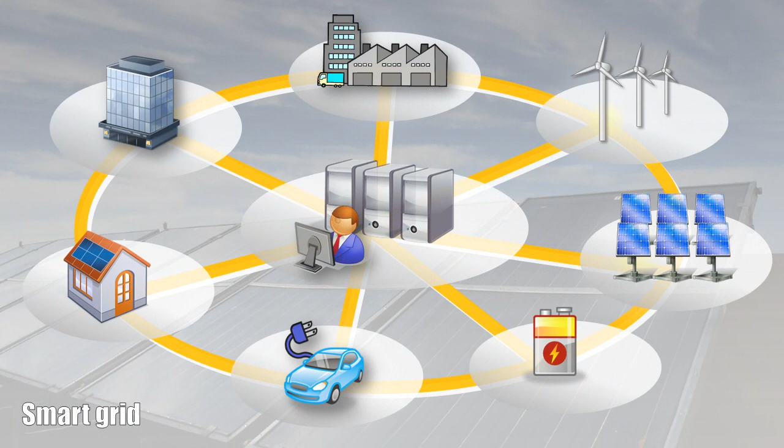We would like to begin with the electric switchboard market in the world. Power demands are growing rapidly in recent years, especially in economic growing countries such as China, India, and Brazil. We also see global increase in power demands since we are moving to a next generation social system called smart grid that optimizes energy efficiency. Based on these backgrounds, the global market size for electric power distribution is expected to grow twice the size in 10 years, from 2010 to 2020.

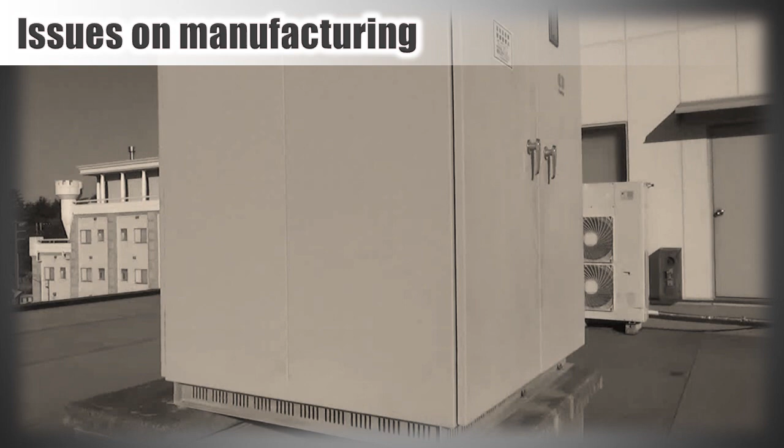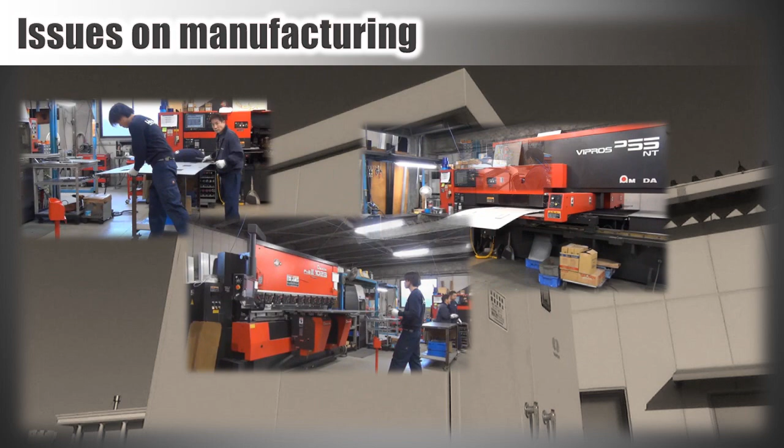The companies are, however, required to differentiate their products with short delivery and customization while complying with standardized functions such as durability and strength within severe production cost restrictions. Also, from manufacturing perspectives, it is thought to be easy to manufacture since they are box-shaped, but each customer has different sizes of electric equipment or setups, resulting in high-mix, low-volume production, which is very difficult to improve efficiency in.

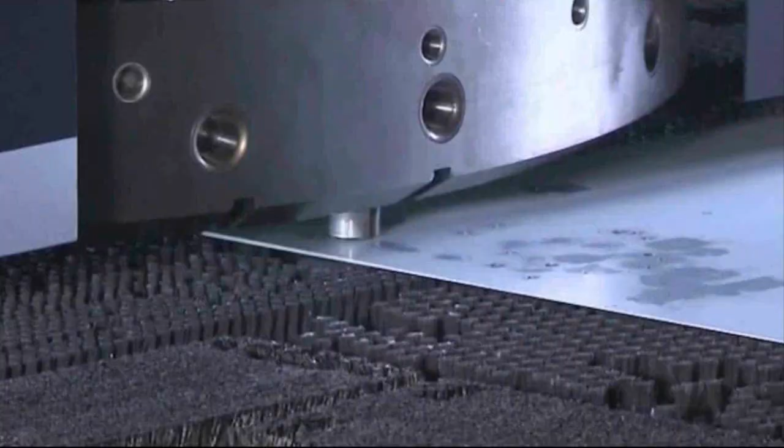Therefore, lead time and cost reduction are required in both the design process and manufacturing process, and reform for new manufacturing is imminent.

Now, we will show you a case study for improving efficiency with outdoor distribution boards used for solar power generation and busbar electric components.

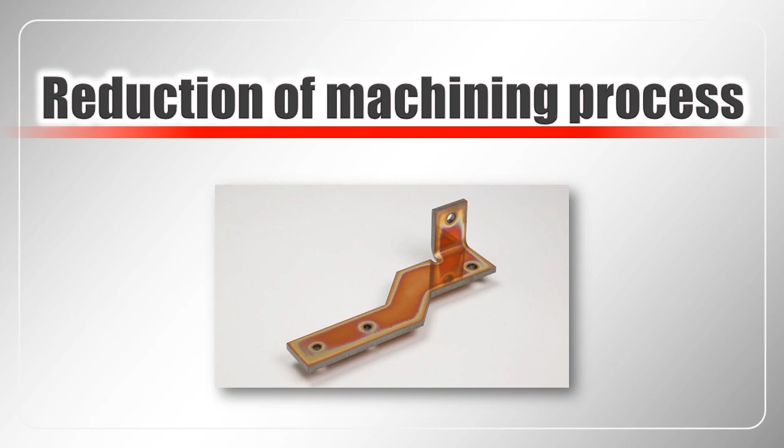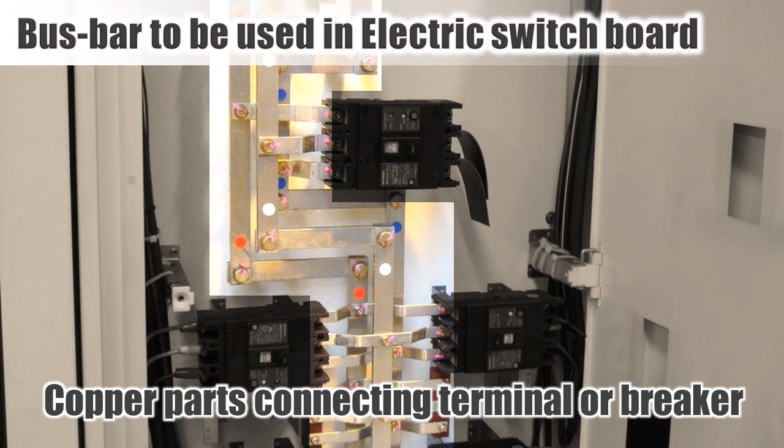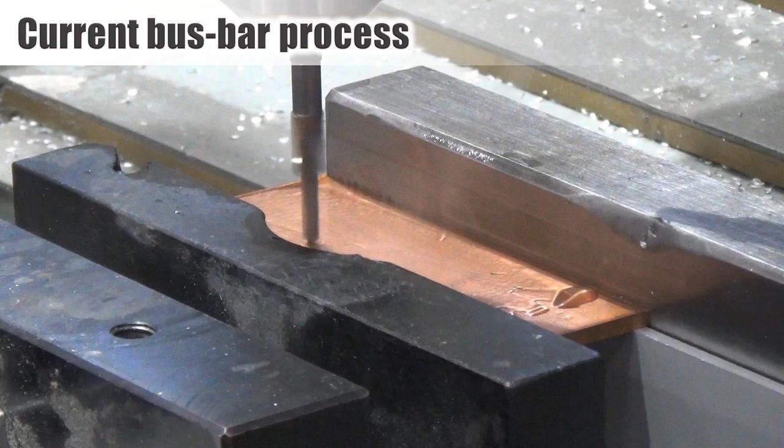First, we will show you the reduction of machining process of busbars. Busbars are used to distribute electricity by connecting terminals and breakers inside the electric switchboards. They are made of copper and coated to a silver color. Busbar blanking processes are generally done by machining or punching.

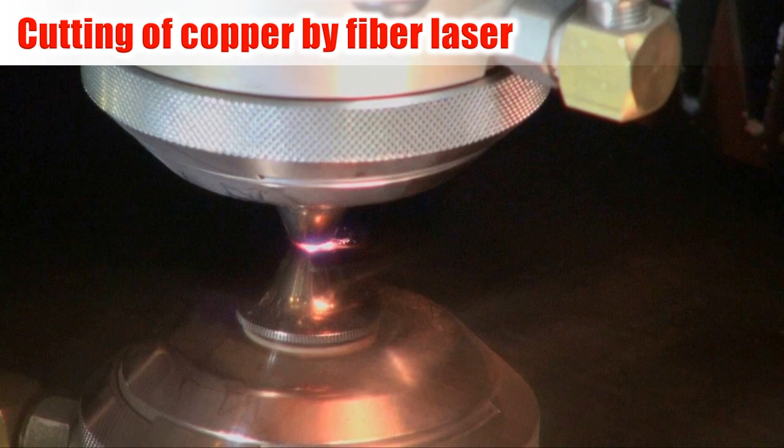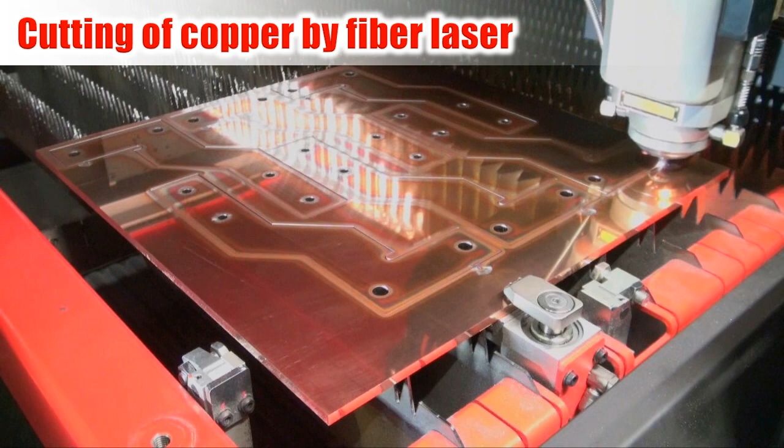Today we would like to introduce the cutting of copper with a fiber laser machine as a new processing method. As you can see, the fiber laser machine enables high speed and high quality cutting of copper. This was made possible by the different characteristics of the laser beams.

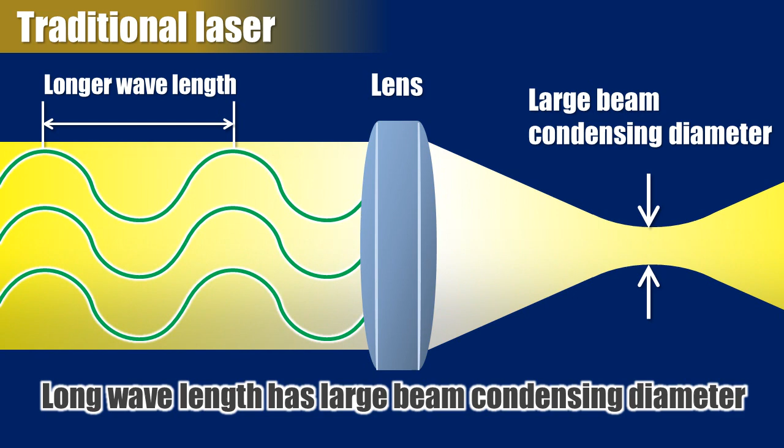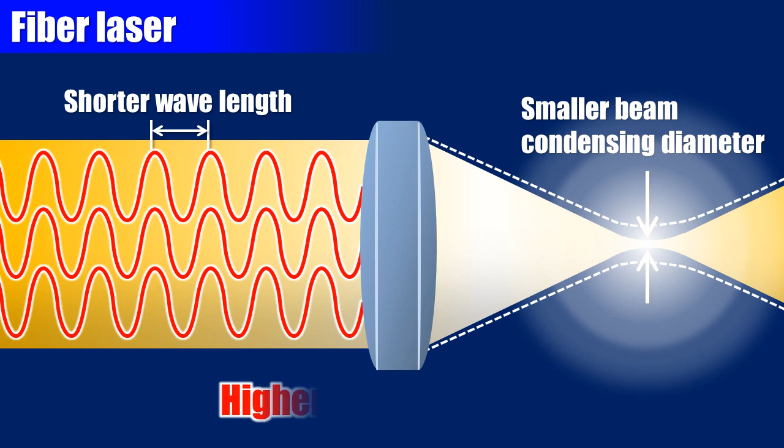The wavelength of a laser has a correlation between beam condensing and reflective ratio. Let me briefly explain their characteristics. The traditional laser with long wavelength has a large beam condensing diameter. By contrast, fiber laser with short wavelength has a smaller beam condensing diameter, so the energy density at the focal point of fiber laser is higher.

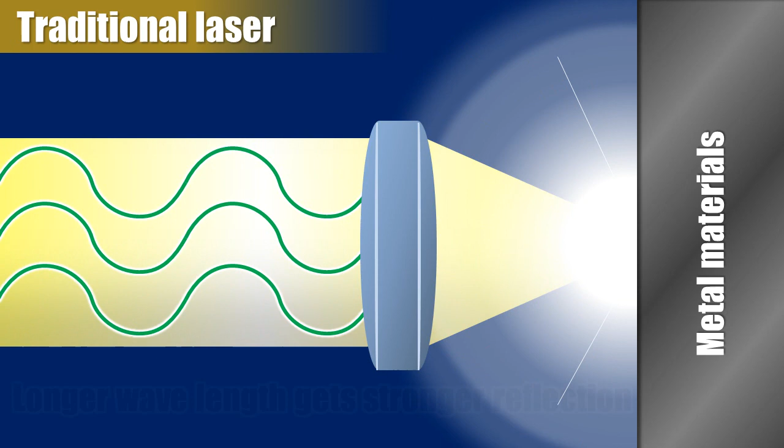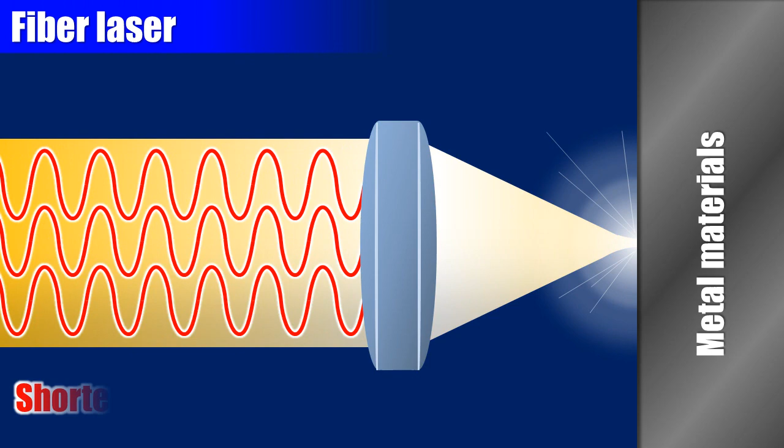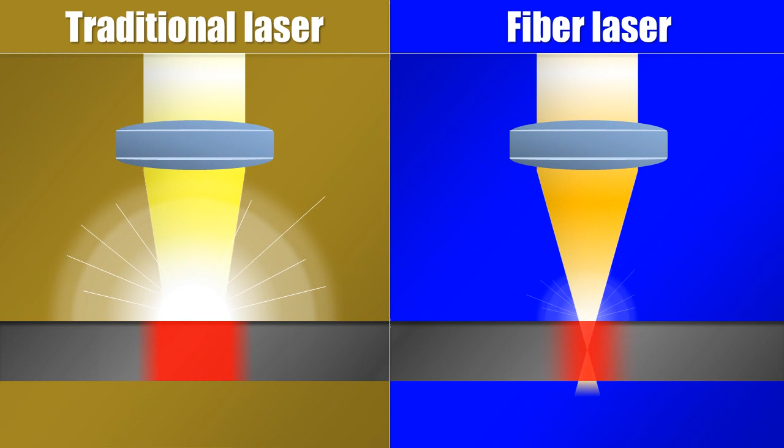Also, when laser beam is applied to metallic material, longer wavelength of traditional laser gets stronger reflection. By contrast, fiber laser with shorter wavelength gets weaker reflection. Therefore, fiber laser can cut copper, which is generally called a highly reflective material, at high speed since laser energy can penetrate efficiently.

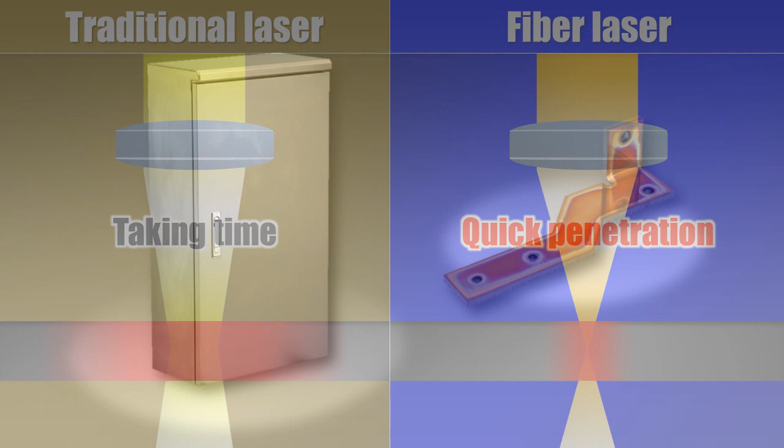From here, we will show you how to increase work efficiency with outdoor distribution boards as an example. First, we will introduce the new blanking method that will eliminate the painting preparation task.

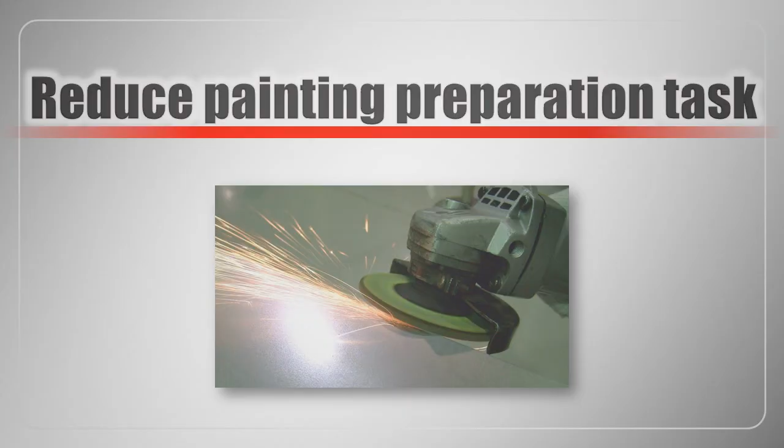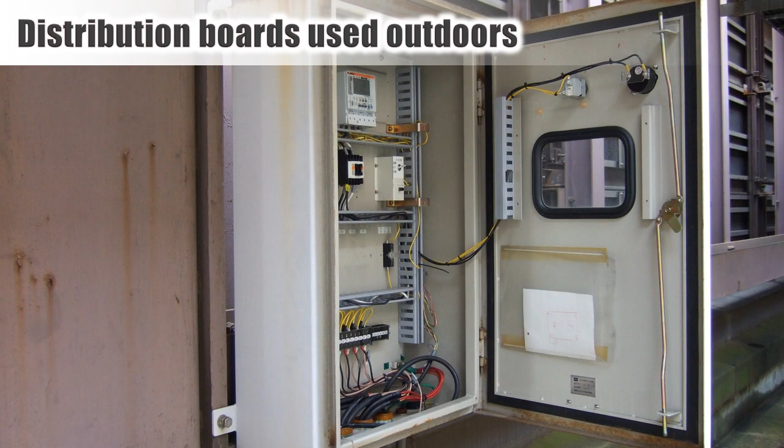Various durability performances are required in distribution boards used outdoors, and one of them, resistance to corrosion, is a particularly important factor. One of the spots that are susceptible to rust is the end face of the sheet material. It depends on how it is painted, but if the edge of the end face is sharp, the coating paint is thin and more susceptible to rust.

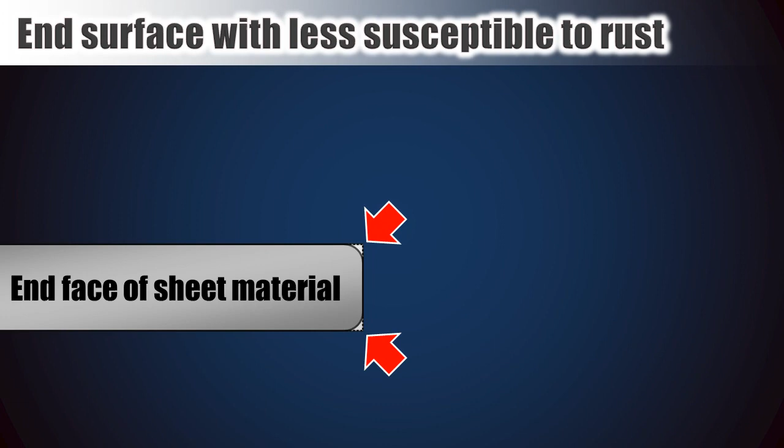By finishing the sharp edge of the end face into a radius, the thickness of paint on the edge is more even, therefore less susceptible to rust. So the sharp edges are round chamfered by hand before the painting process.

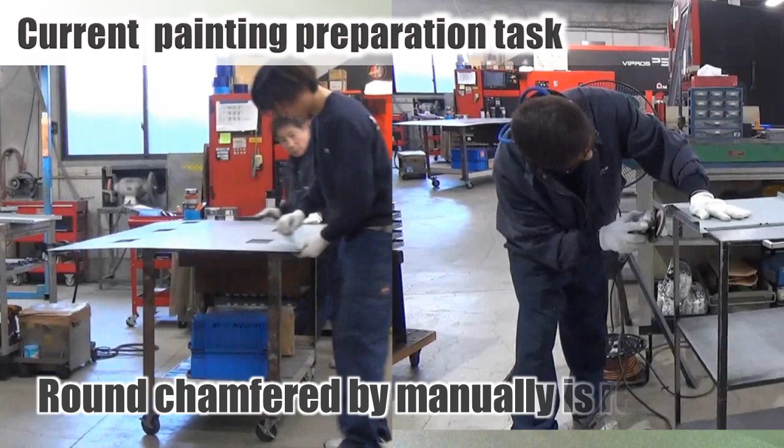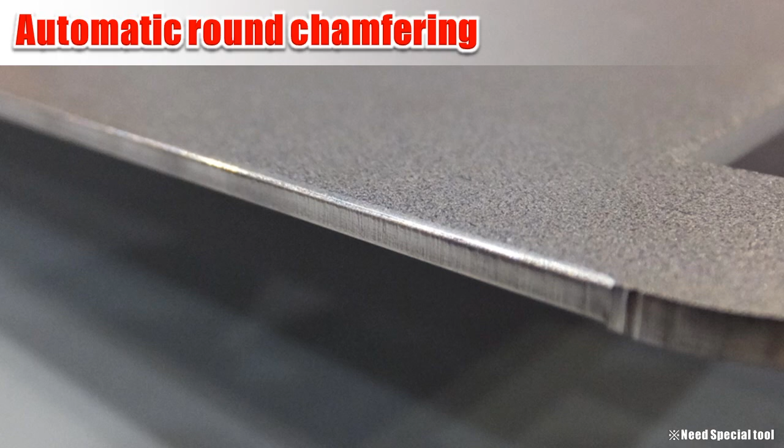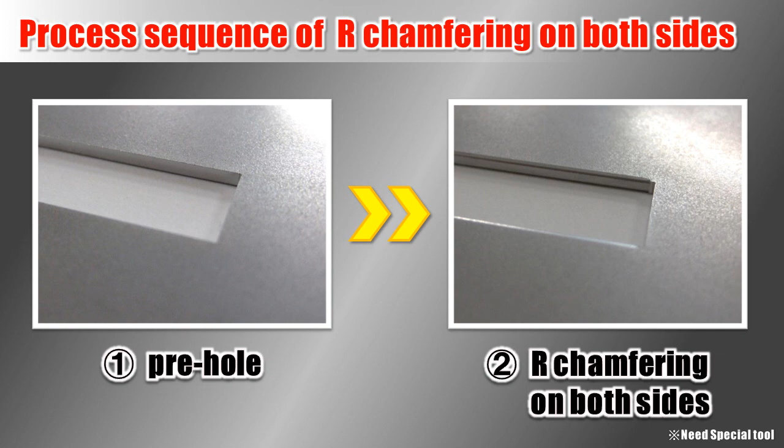Today we will show you how to reduce lead time and stabilize quality by incorporating the round chamfering process automatically into the blanking process. Round chamfering is done in two steps: pre-hole, then R chamfering on both sides. The first process is the pre-hole.

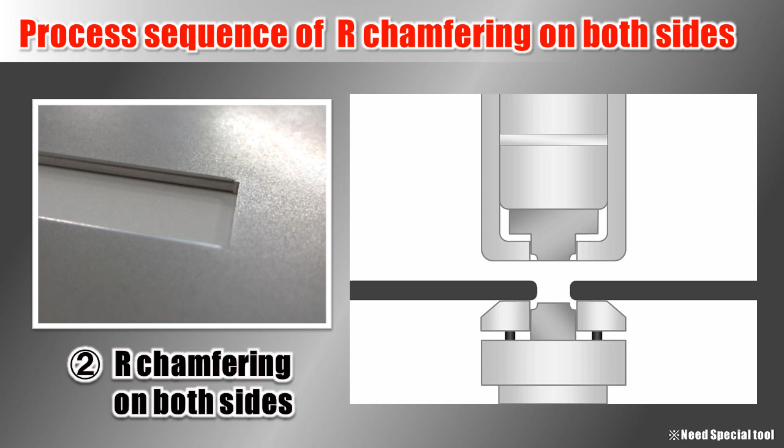Second process is the R chamfering on both sides. Round shape is formed by progressive feeding process, so the process length can be set freely. Here we use the tool to feed at 18mm pitch.

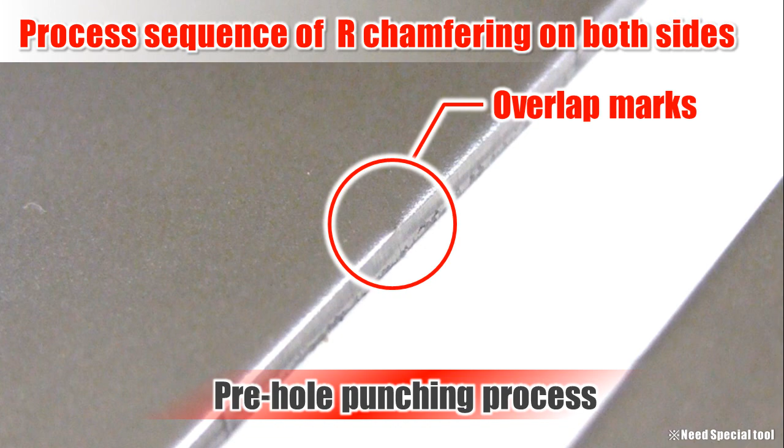Pre-holes can be done by punching as well. The overlap marks and burrs from this process can also be round chamfered.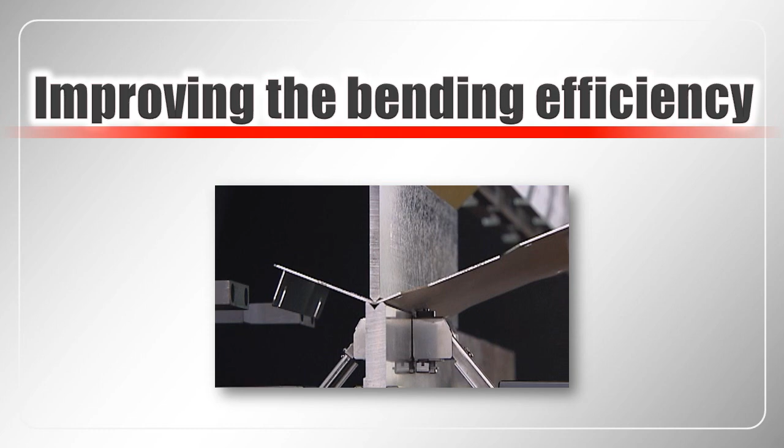Next, we have two proposals for improving the bending efficiency. It is very hard and difficult to get a right angle for large and heavy material. If the production lot is small, your workload is even heavier.

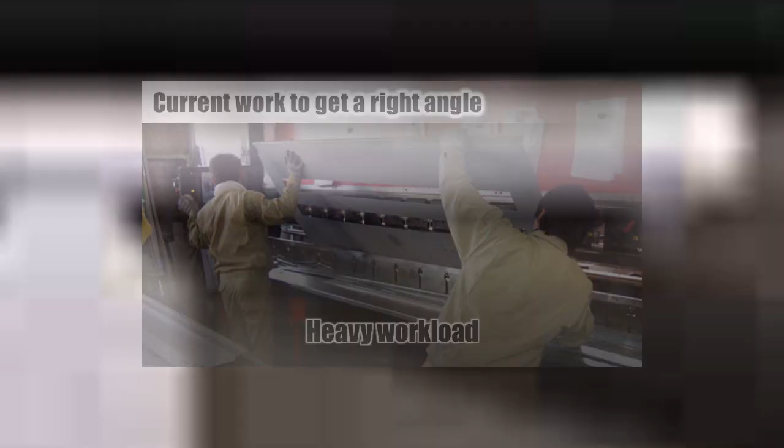Bending angle sensor enables correct angle from the first try even for new orders. Besides reducing the lead time of the bending process, the quality of the next welding process will be improved.

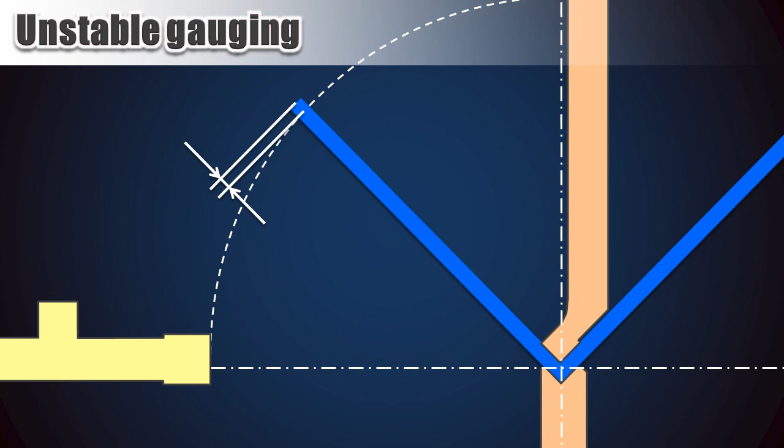Also, gauging of large size material is difficult and hard. If the distance between the bend tool and back gauge position is far, dimensional accuracy will not be steady due to the difficulties of material horizontal gauging.

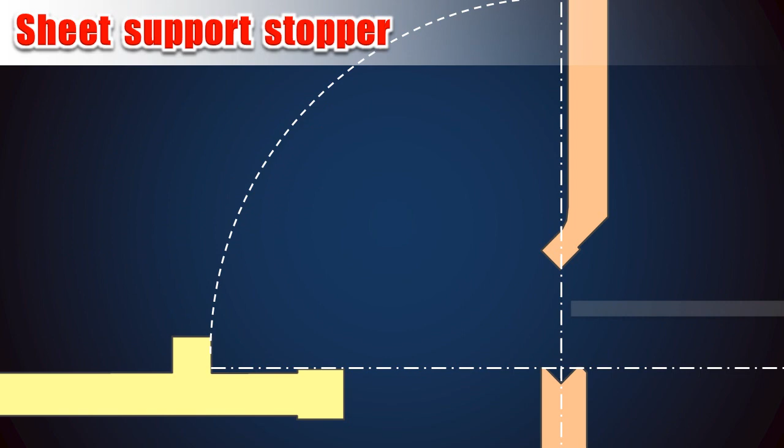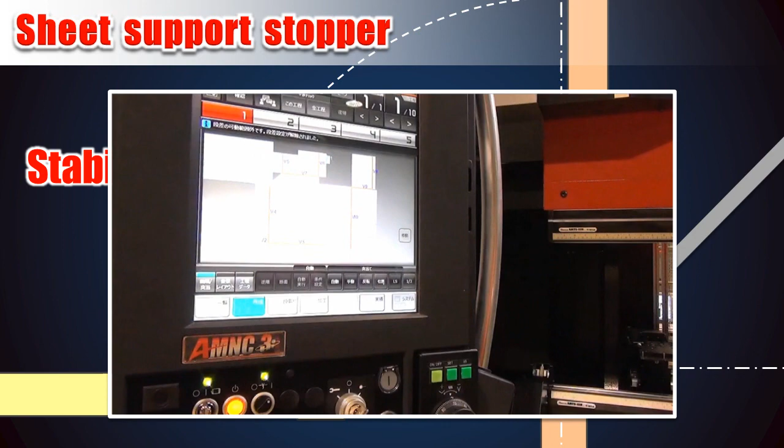In this case, back gauge with support fingers should be used for speedy and accurate back gauge positioning. The back gauge position is automatically calculated by pressing the button on the operation panel.

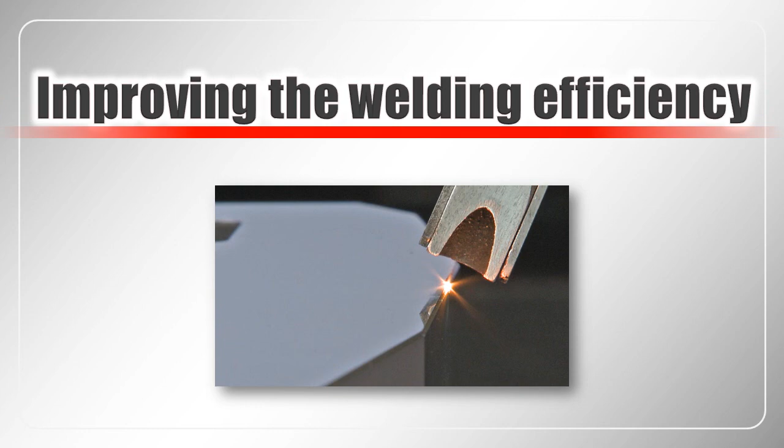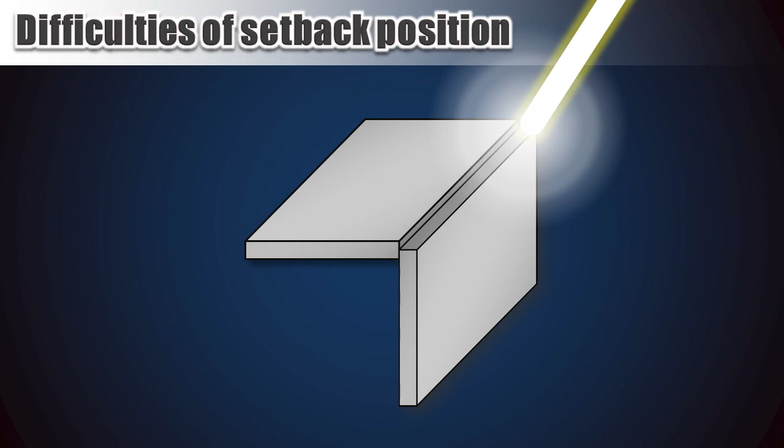Next, we have two proposals for improving the welding efficiency. When the welded section is made like a radius shape, the setback amount is half of the sheet thickness. This setback positioning is very difficult.

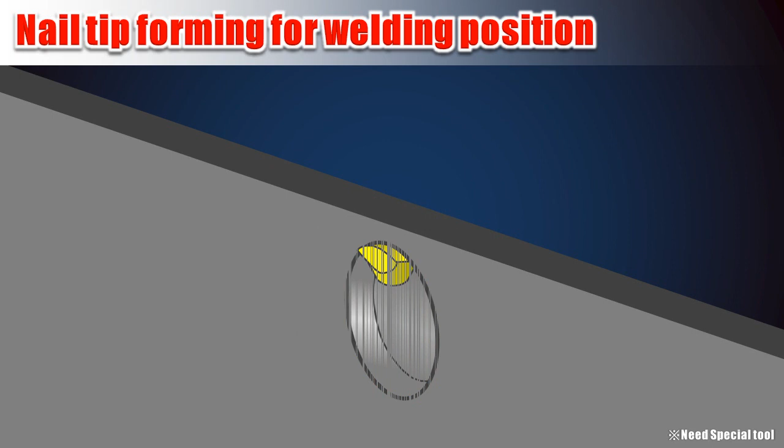Here we introduce nail tip forming that effectively reduces the positioning workload. By adding this process, setback of half sheet thickness can be done easily.

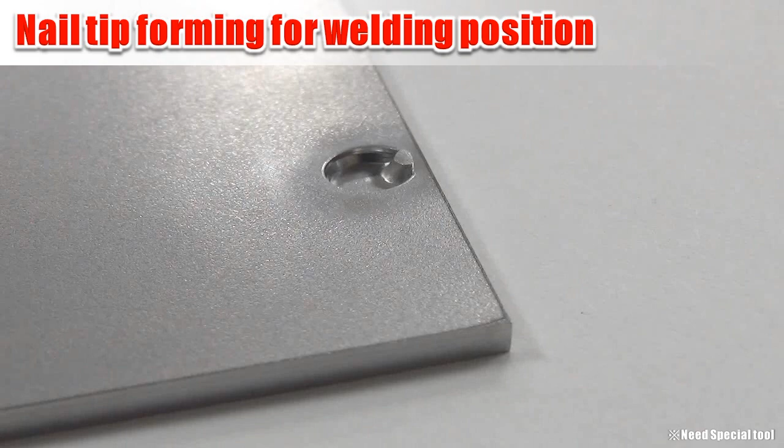This will not only reduce the positioning time of tack welding, but also improve component accuracy. Also, the back surface is flat, so finishing process is not necessary.

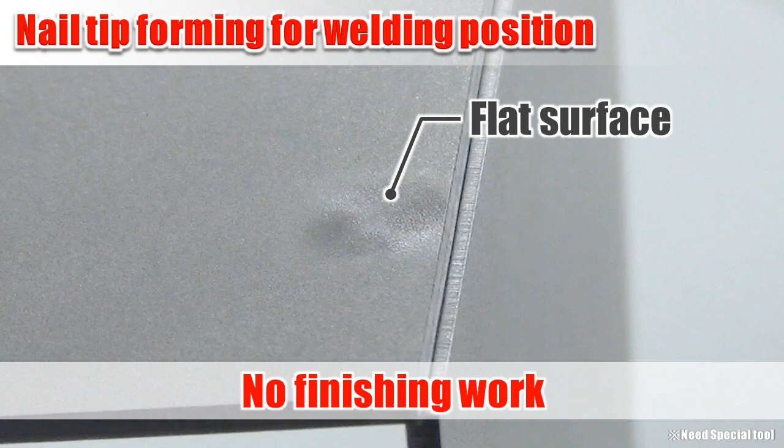The nail tip forming in the blanking process will be done in a single process. Press material swells and forms the nail tip shape.

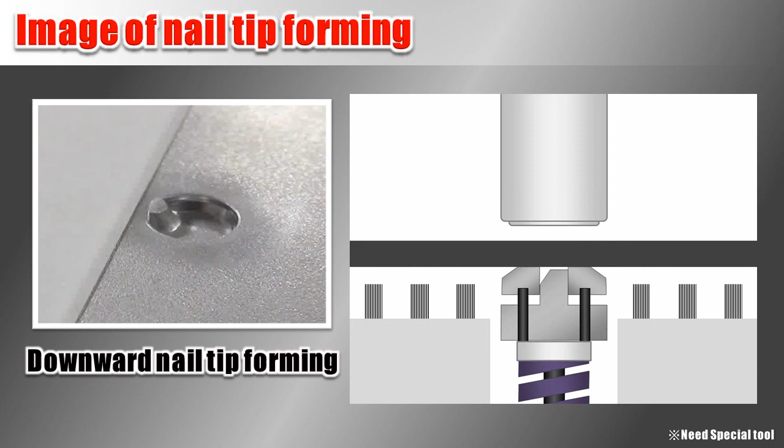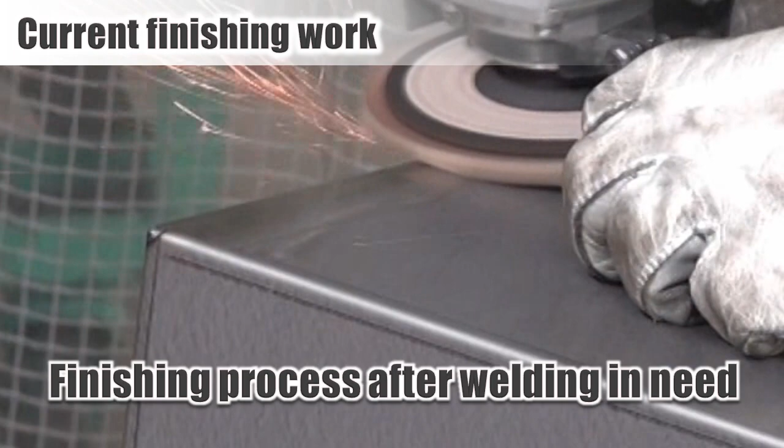Next, our proposal is for reducing the finishing process. With general welding such as TIG, finishing process is required after welding. However, the latest high-grade fiber laser welder doesn't require finishing process, and significant lead time reduction is also possible.

Less heat distortion is one of the main characteristics of fiber laser welding too.

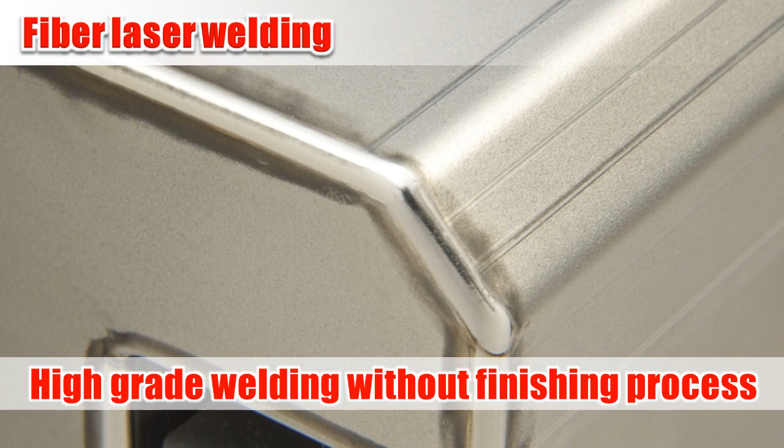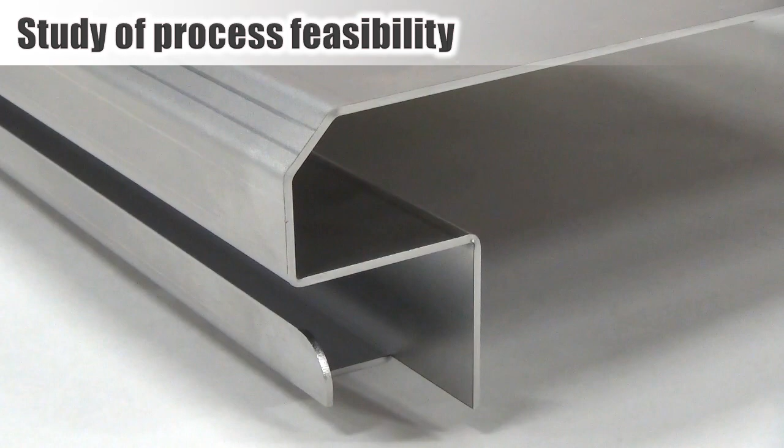Lastly, we would like to propose efficient programming. For complex shapes like these, time is spent with the study of bend sequence, tool selection, and welding feasibility in the programming stage.

By utilizing simulation, feasibility checks are done easily in short time, eliminating reworks at the shop floor.

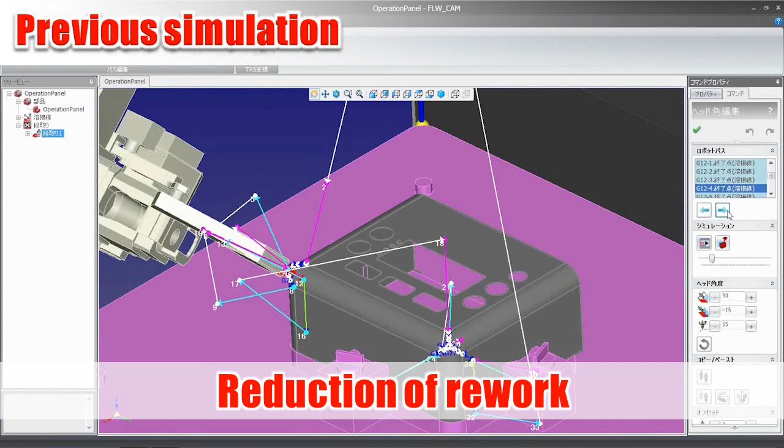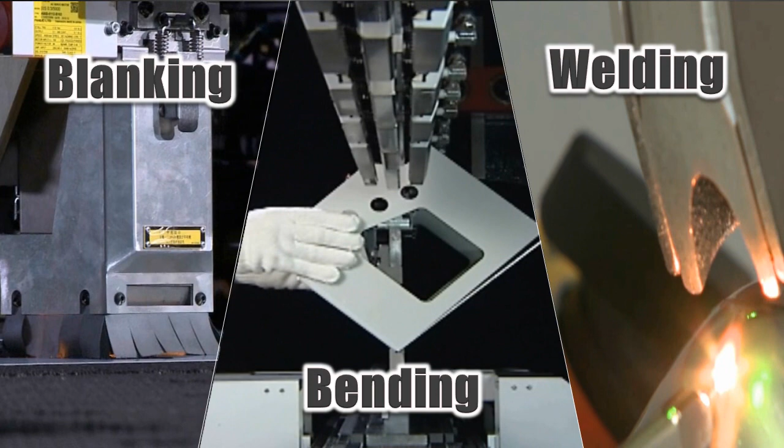Here, we would like to introduce our latest blanking, bending, and welding solutions that utilize the processing technologies we have just introduced to you.

The fiber laser machine FOL-AJ is for high-speed, high-accuracy cutting of various metals, including stainless steel, aluminum, and copper.

The punch laser combination machine ACIES and the punching machine EMZR are for integrating multiple processes into the blanking process and effectively realize automation of high-grade processing.

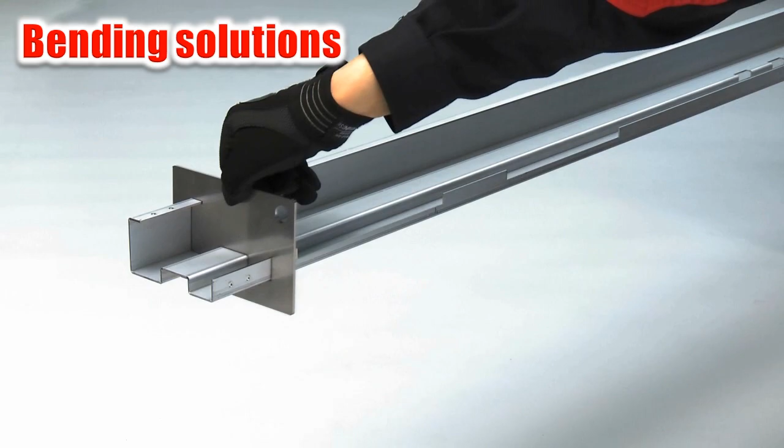The next generation hybrid drive bending machine HG is for realizing high productivity for complex shape bends and radius.

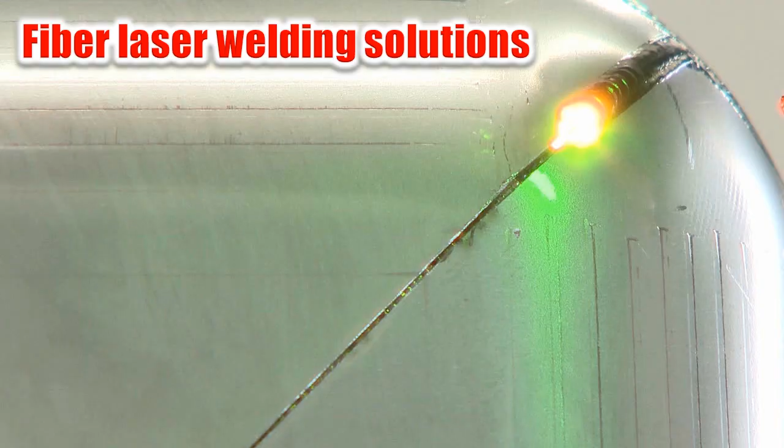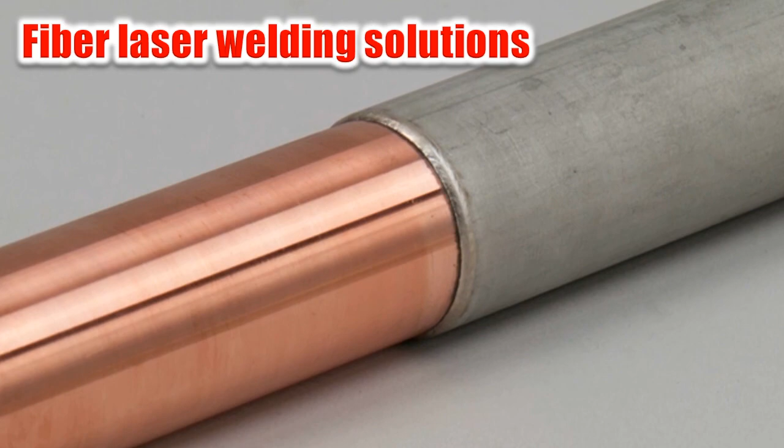The fiber laser welding machine FLW is for realizing high-grade processing, challenging the boundaries of welding processes.

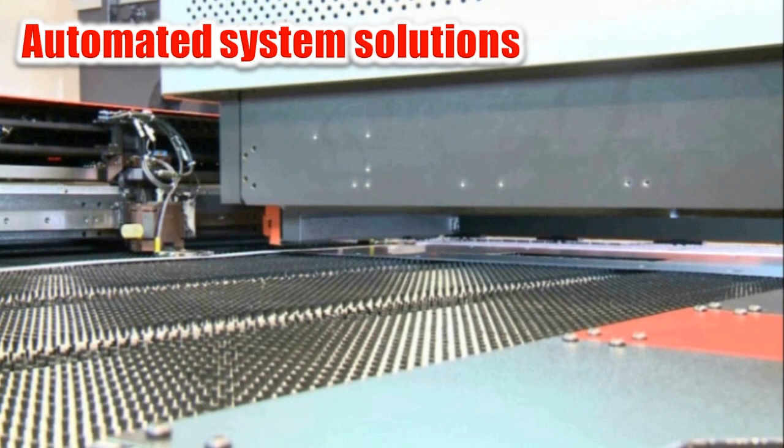From blanking to bending, the punching and L-shaped shear combination machine LOSC and the panel bender EP are the automation system line for high-mix low-volume production.

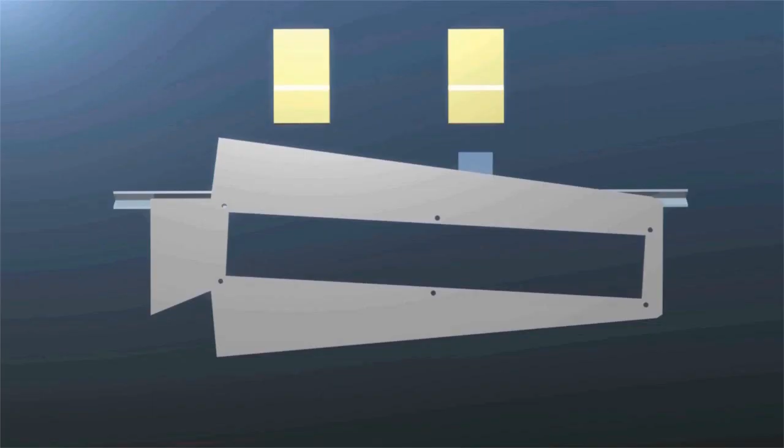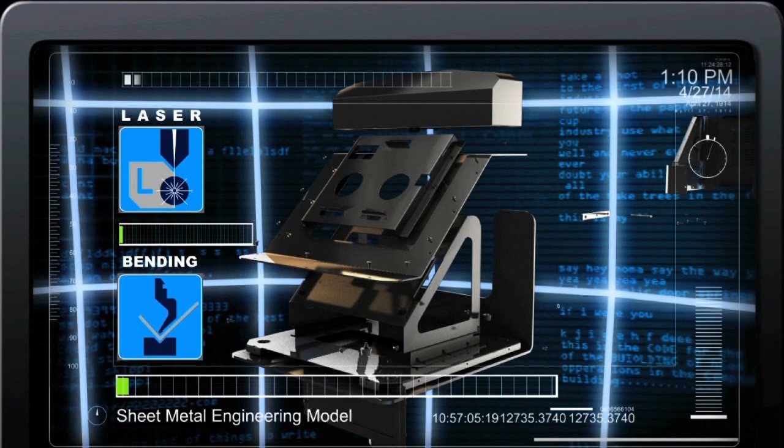We have introduced our leading-edge processing technologies and solutions that will change manufacturing to you today. Amada has been endeavoring on systems to reduce the lead time of high-value added products without depending on skills in all process stages.